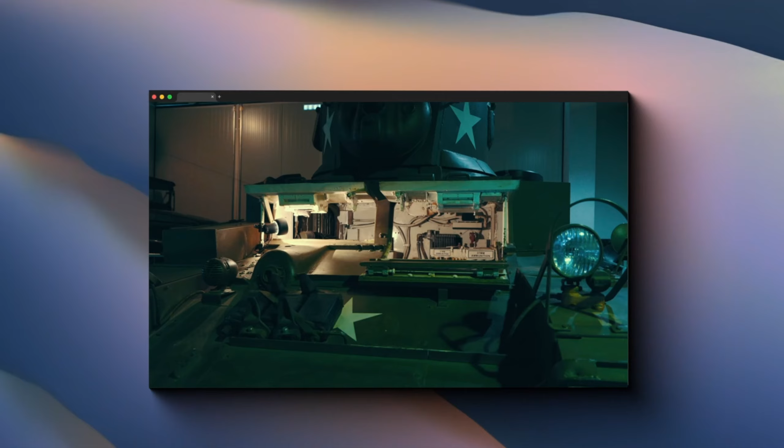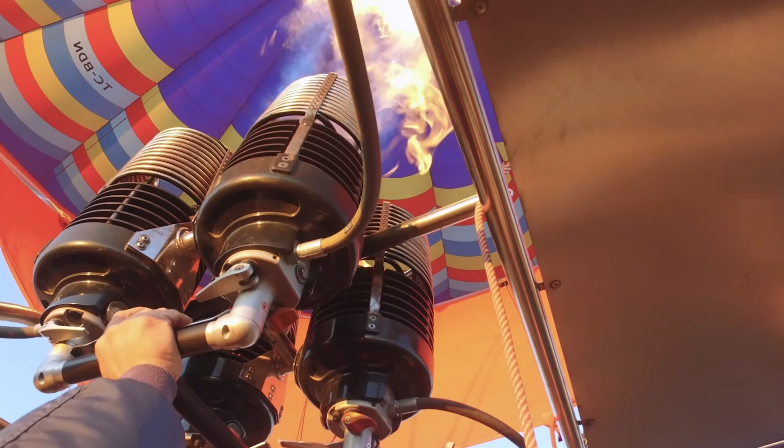Let's start by clearing up a massive misconception. When I say gas engine, I'm talking about the reciprocating piston engines you find in cars, not the fuel itself. Because here's where it gets interesting, modern jet engines actually do burn a type of gasoline. It's called jet fuel or kerosene, which is basically gasoline's more refined cousin.

But the way these engines burn that fuel? That's where the magic happens. It's the difference between pushing yourself on a skateboard versus strapping a rocket to your back. Both might get you moving, but one is clearly better suited for certain situations.

Think about this for a second. A typical car engine has hundreds of moving parts: pistons pumping up and down, valves opening and closing, a crankshaft spinning around. It's like a mechanical orchestra where every instrument needs perfect timing. Now imagine trying to conduct that orchestra while flying through a thunderstorm at 500 miles per hour. Starting to see the problem?

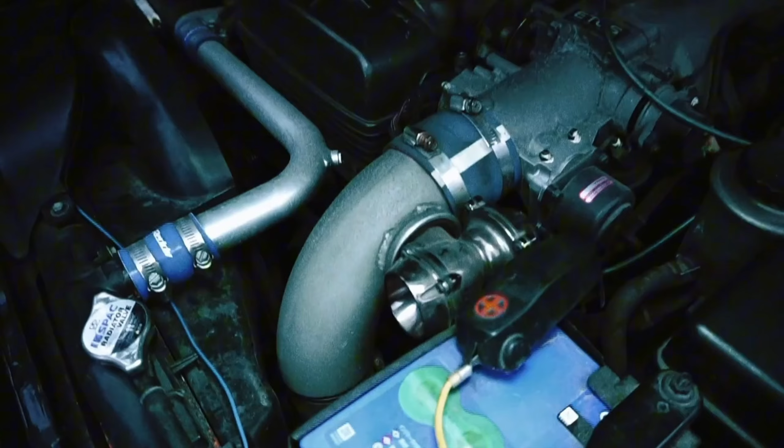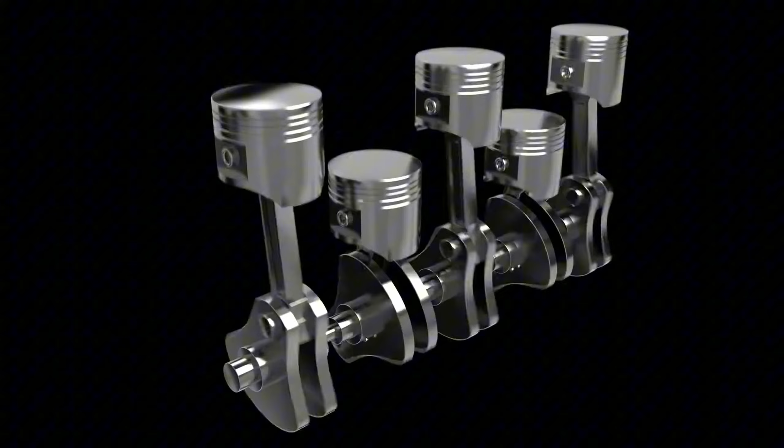Here's where we need to talk about something called the altitude problem. Lighting a match at sea level is much easier than lighting a match at the top of Mount Everest. Why? Because the air up there is about 1/3 as dense as it is down here. Your car engine faces the exact same problem. Piston engines are like that friend who can only function with their morning coffee, except their coffee is oxygen. They need a very specific mixture of fuel and air to work properly.

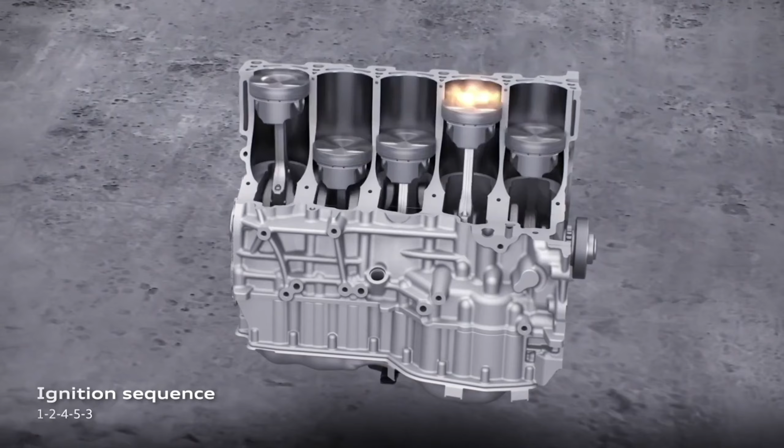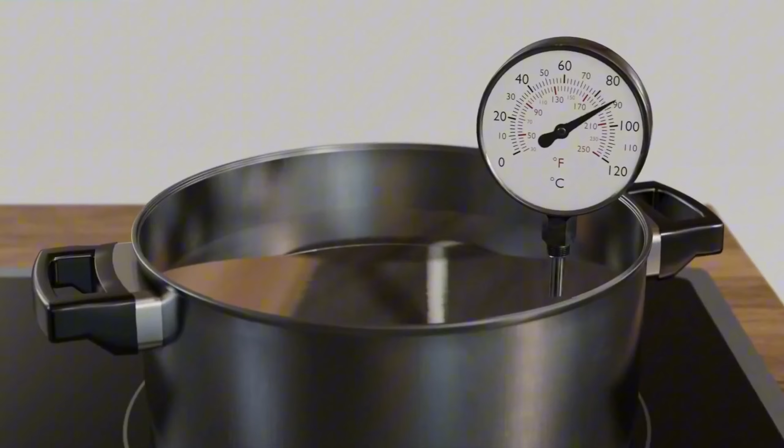At sea level, no problem. But climb to 30,000 feet, and that engine is basically suffocating. Commercial airliners cruise at altitudes where the air pressure is so low that water boils at room temperature. Your car engine would wheeze, sputter, and die long before reaching those heights.

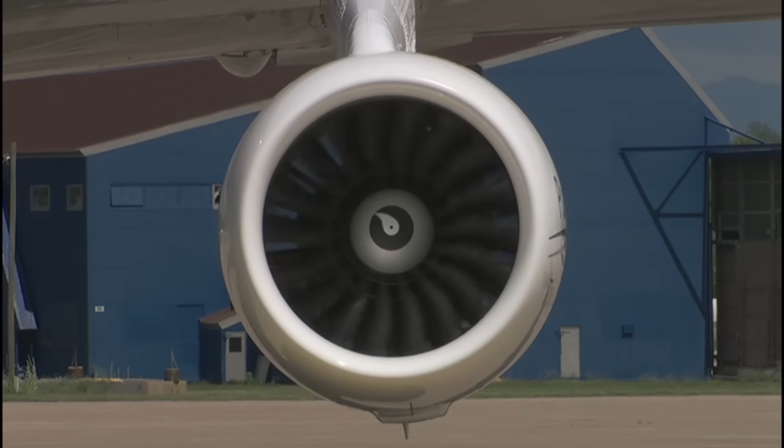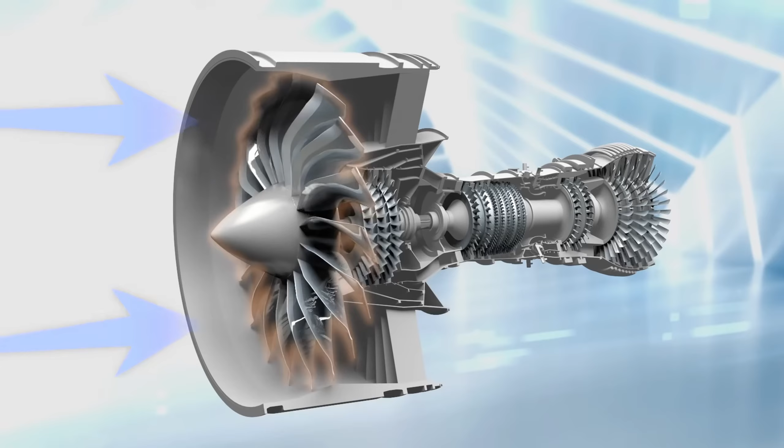Meanwhile, jet engines actually love thin air. They're designed to compress massive amounts of air internally. We're talking about compression ratios that would make your car engine explode. A modern jet engine compresses air by a factor of 40 to 1. It's creating its own atmospheric pressure, basically bringing sea-level conditions with it wherever it goes.

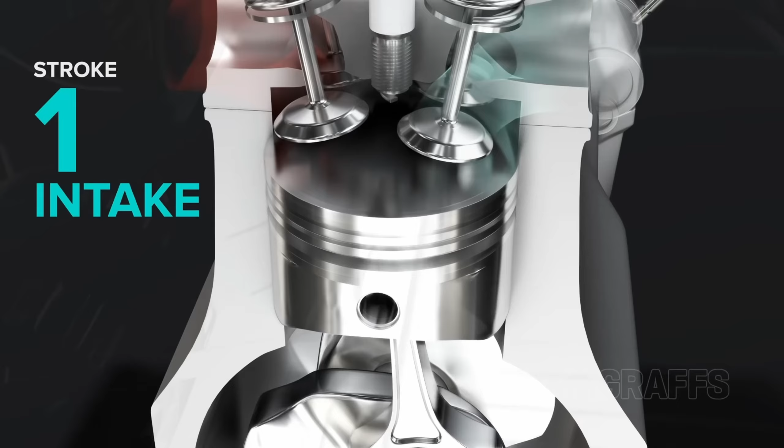Here are some numbers that will blow your mind. A typical car engine produces about 0.5 horsepower per pound of engine weight. Not bad for getting you to work and back. But a modern jet engine? We're talking about 6 to 8 horsepower per pound. Imagine if your 300 horsepower car engine suddenly had 3,600 horsepower but weighed the same. That's the kind of power density we're talking about. It's like comparing a household fan to a hurricane.

Here's a real-world example. The General Electric GE90 engine, which powers Boeing 777s, produces 115,000 pounds of thrust. Converting that to horsepower at cruising speed, we're looking at roughly 100,000 horsepower from one engine. That's more power than 100 Formula One race cars combined.

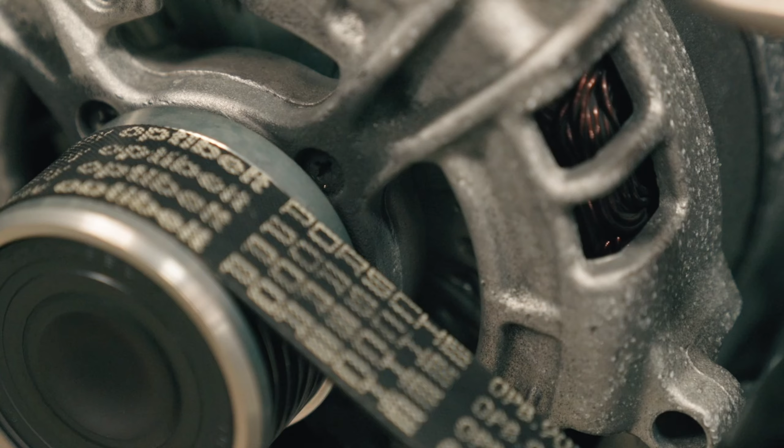Now imagine trying to get that same power from piston engines. You'd need an engine the size of a building, and your plane would look less like an aircraft and more like a flying warehouse. Not exactly aerodynamic. But here's the kicker. It's not just about raw power, it's about sustained power. Your car engine might produce peak power for a few seconds during acceleration, but a jet engine maintains enormous power output for hours on end. It's the difference between a sprinter and an ultramarathon runner who can sprint the entire race.

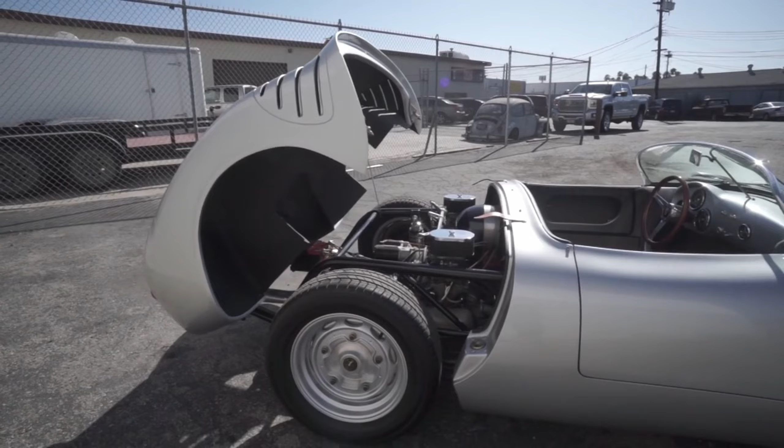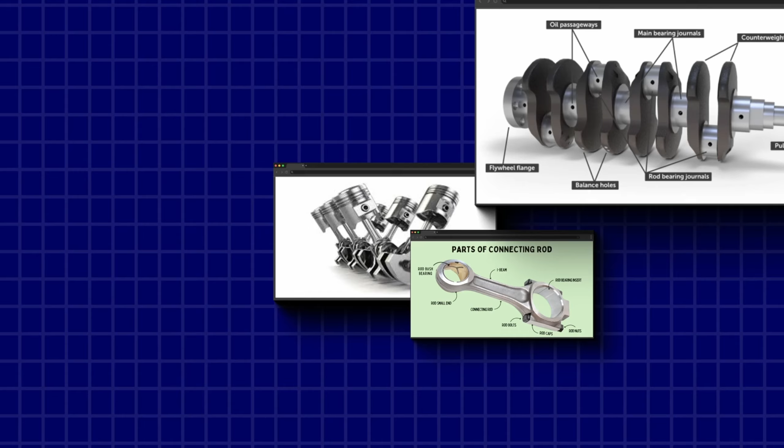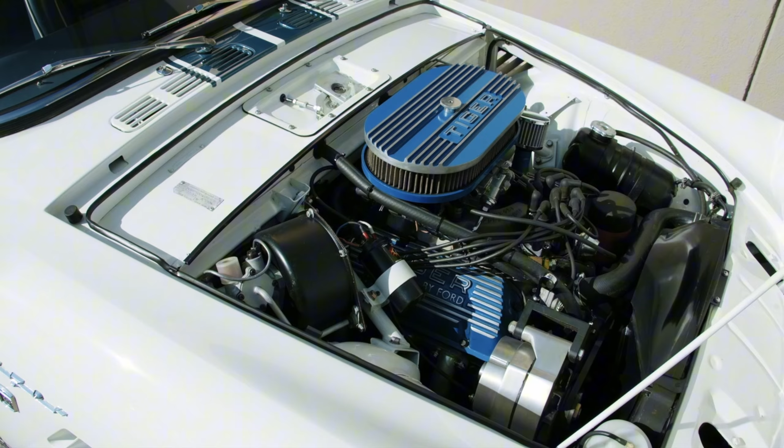This might sound counterintuitive, but jet engines are actually simpler than car engines. I know, how can something that costs millions of dollars be simpler than what's under your Honda's hood? Let's break it down. A car engine has pistons, connecting rods, a crankshaft, camshafts, valves, valve springs, timing chains, and dozens of other reciprocating parts. Each part moves back and forth or up and down thousands of times per minute.

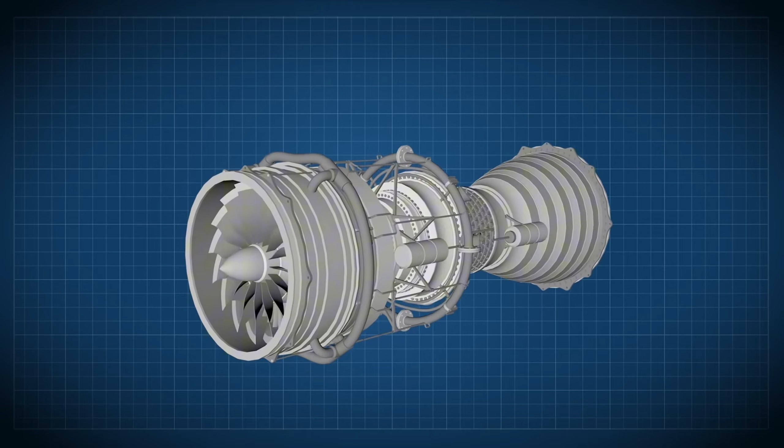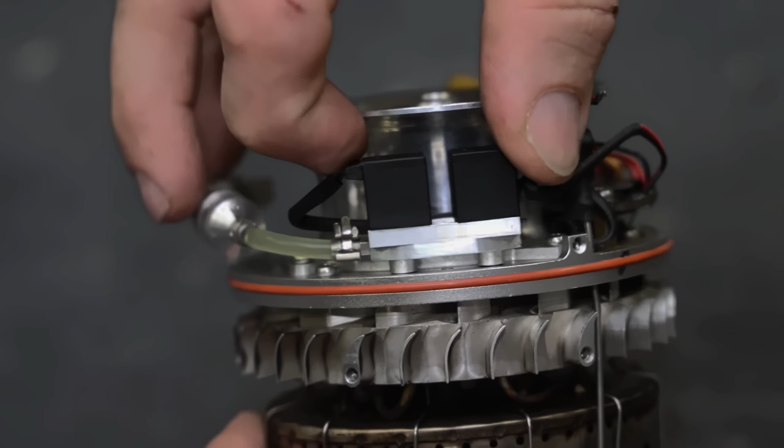Every direction change is a stress point, a wear point, a potential failure point. A jet engine? It basically has one moving part, a shaft with compressor blades on one end and turbine blades on the other. Everything spins in one direction, continuously, smoothly. No reciprocating motion, no complex valve timing, no distributor caps or spark plug wires to worry about. It's elegant in its simplicity. Leonardo da Vinci would have loved it.

Maximum efficiency through minimum complexity. Think about it this way: what's more likely to break, a ceiling fan that spins continuously, or a sewing machine with all its intricate back-and-forth motions? The jet engine is the ceiling fan of the aviation world.

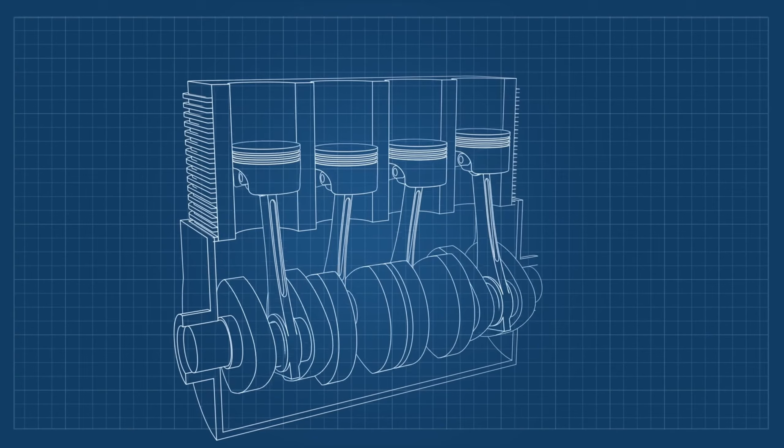If ceiling fans could generate hurricane-force winds and run for 20,000 hours between overhauls... here's something you've probably never thought about while flying: vibration can literally shake an airplane apart. I'm not trying to scare you, modern planes are incredibly safe. But vibration is an engineer's nightmare at 35,000 feet.

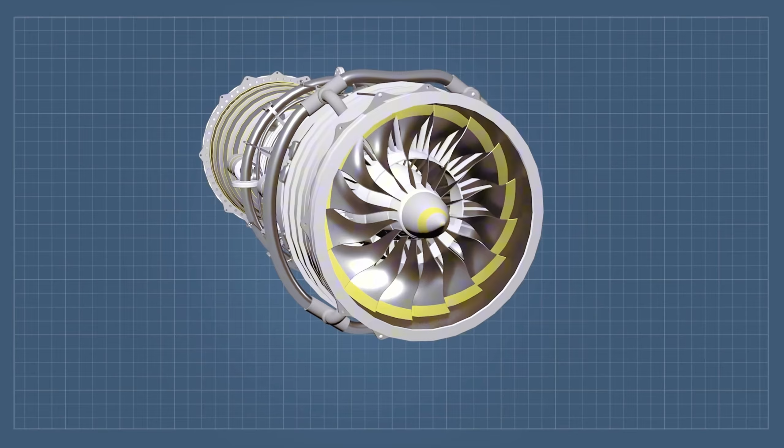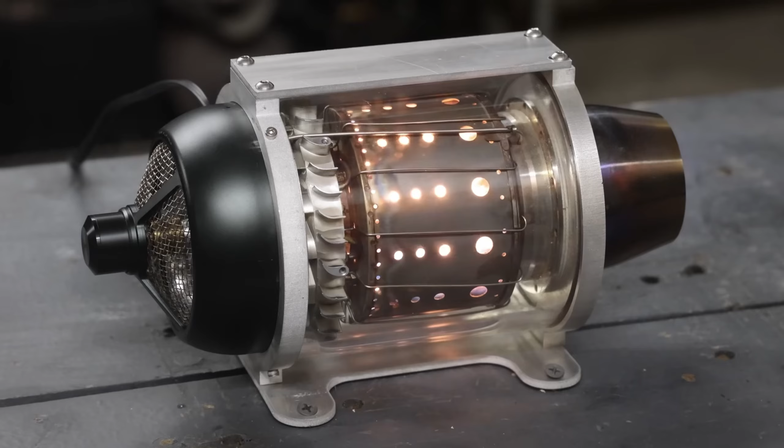Piston engines are vibration machines. Every time a piston fires, it's like a tiny hammer blow. In a six-cylinder engine running at 2,500 RPM, that's 7,500 little explosions per minute. Each one sends a shockwave through the engine mount, through the wing, through the fuselage. Over time, this can cause metal fatigue, loose rivets, and cracked components. Now multiply that by the 4, 6, or even 8 engines you'd need to power a large aircraft with piston power. It would be like strapping a paint shaker to each wing and hoping for the best.

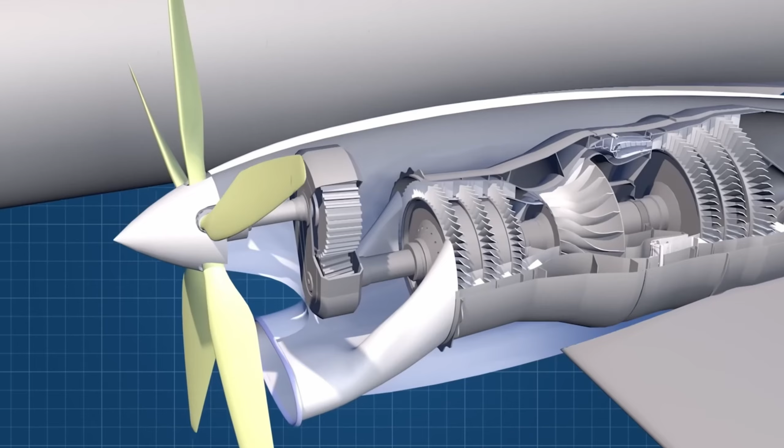Jet engines, on the other hand, run smooth as silk. The combustion is continuous, not pulsed. The rotation is balanced and constant. Passengers can place a coin on edge on their tray table and it'll stay standing during cruise flight. Try that in a propeller-driven aircraft with piston engines — that coin would dance off the table faster than you can say turbulence.

This isn't just about comfort. Reduced vibration means less maintenance, longer component life, and most importantly, better safety margins. When you're 7 miles up in the sky, you'll want everything running as smoothly as possible.

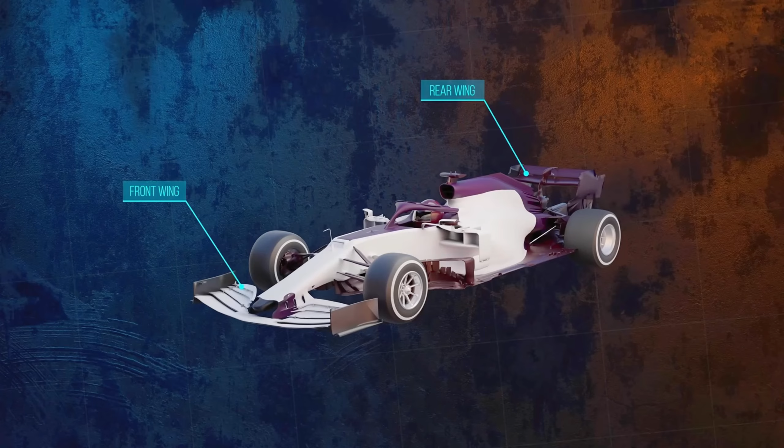Let's talk about speed, because this is where piston engines hit a brick wall — literally, an aerodynamic brick wall. Propeller-driven aircraft with piston engines face a fundamental problem: propeller tips can't exceed the speed of sound without losing efficiency dramatically. As a propeller blade approaches sonic speed, it creates shock waves that destroy lift and create enormous drag. It's like trying to swim through molasses instead of water.

This limits piston engine aircraft to about 400 to 450 miles per hour max, and that's pushing it. Most cruise much slower, around 200 to 300 miles per hour. Meanwhile, jet engines laugh in the face of the sound barrier. They're designed to handle supersonic airflow. The Concorde cruised at Mach 2, twice the speed of sound. Modern commercial jets cruise at about 550 miles per hour, just under the sound barrier. Not because they can't go faster, but because going faster isn't economically efficient for passenger travel.

Here's a mind-bending comparison. A flight from New York to Los Angeles in a modern jet takes about 5.5 hours. In a fast piston engine aircraft, you're looking at 12 to 15 hours minimum with multiple fuel stops. That cross-country business trip just became a 2-day adventure.

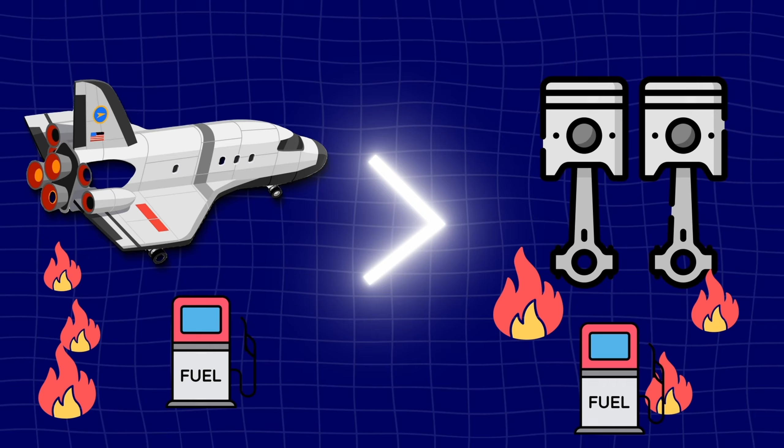This might shock you, but jet engines are actually more fuel efficient than piston engines for their intended purpose. Wait, what? How can something that burns thousands of pounds of fuel per hour be efficient? It's all about the right tool for the job. Sure, a jet engine burns more fuel per hour than a piston engine, but it's also moving 300 people at 550 miles per hour.

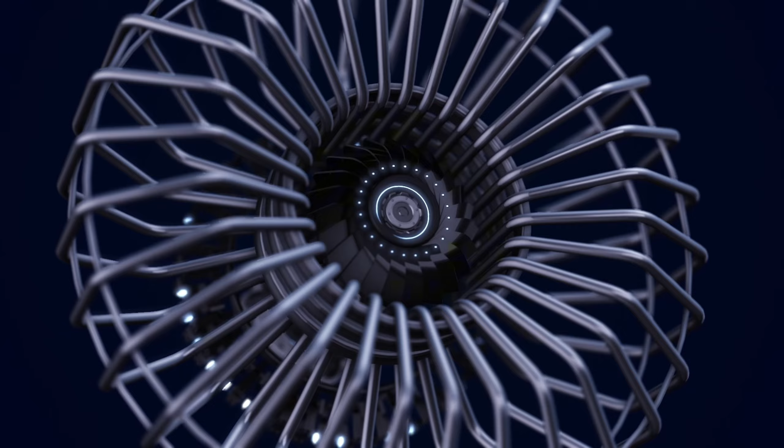Do the math on fuel per passenger mile, and suddenly jets look pretty good. Modern high-bypass turbofan engines are marvels of efficiency. They move huge amounts of air at relatively slow speeds, which is far more efficient than moving small amounts of air at high speeds. It's the difference between fanning yourself with a newspaper versus blowing through a straw — which one moves more air with less effort? At cruising altitude, where the air is thin and drag is reduced, jets can achieve fuel efficiency that would make piston engines jealous. We're talking about 100-plus passenger miles per gallon in some modern aircraft.

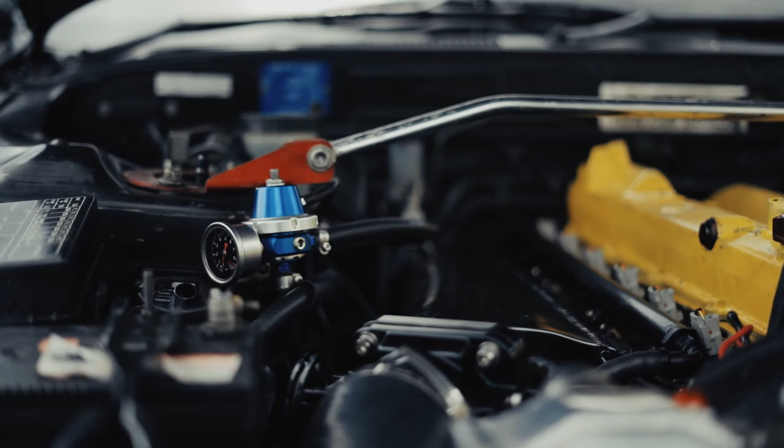Your car probably doesn't even get 100 passenger miles per gallon with just you in it. Plus, jet fuel has more energy per gallon than gasoline, and jets can carry enormous amounts of it without the complex fuel management systems piston engines would need. No carburetors to adjust for altitude, no fuel pumps struggling against vapor lock, no concern about fuel mixture ratios. The engine takes what it needs and burns it completely.

When you're flying over the Pacific Ocean, thousands of miles from the nearest airport, engine reliability isn't just important, it's everything. This is where jet engines absolutely demolish piston engines. Modern jet engines are so reliable that twin-engine planes are certified to fly up to 5.5 hours away from the nearest airport on a single engine. That's called ETOPS, Extended-range Twin-engine Operational Performance Standards. And pilots joke it stands for engines turn or passengers swim.

The mean time between failures for a modern jet engine is measured in tens of thousands of hours. Some engines go their entire service life, 20,000 plus flight hours, without a single in-flight shutdown. That's like driving your car 1.2 million miles without the engine ever failing. Piston aircraft engines require overhauls every 1,500 to 2,000 hours. That's like rebuilding your car engine every 90,000 miles. And in-flight failures, while still rare, are orders of magnitude more common than with jets.

The key is that jets have fewer failure points. No magnetos to fail, no carburetors to ice up, no valve trains to break. Just smooth, continuous rotation with built-in redundancy. Each engine is actually multiple engines in one. If a turbine blade fails, the engine keeps running. Try running your car with a broken piston and see how far you get.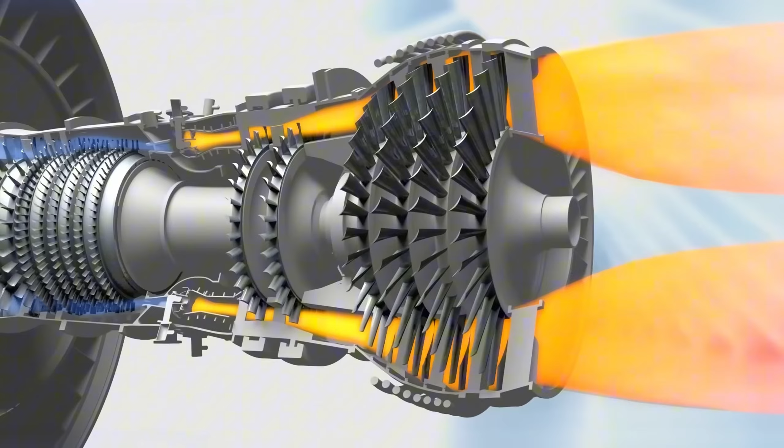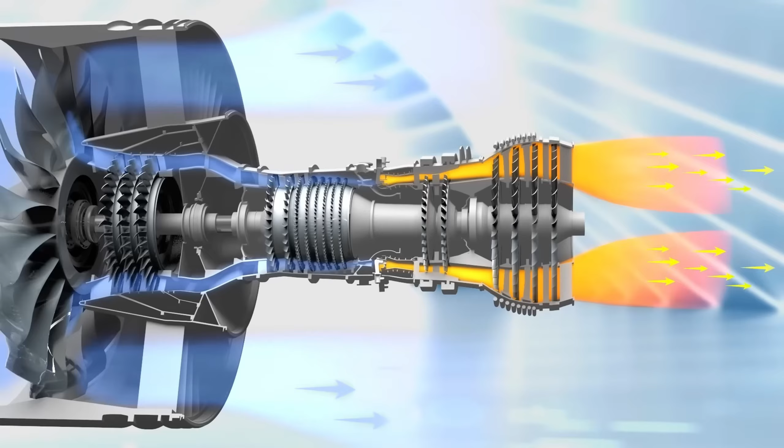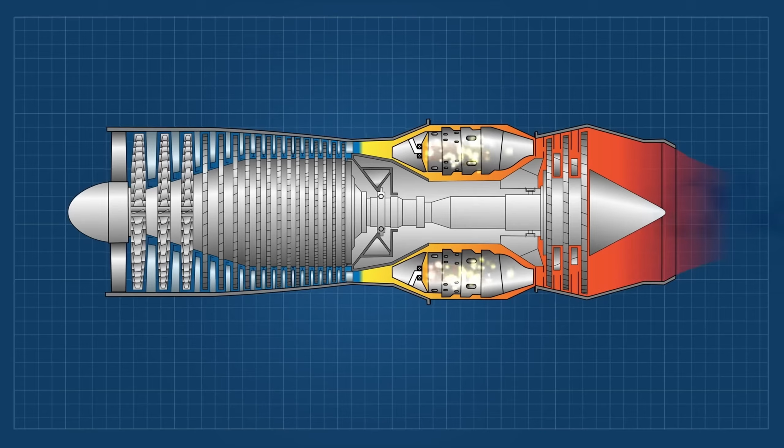Here's something wild. Jet engines actually run hotter than piston engines, but they handle it better. The combustion chamber in a jet engine reaches temperatures over 2,000 degrees Celsius, hot enough to melt the engine itself. So why doesn't it melt? Engineering genius, that's why. Jet engines use sophisticated cooling systems where air flows through tiny holes in the combustion chamber walls, creating a protective buffer of cool air, still hundreds of degrees, but cool by comparison. The metal components never actually touch the hottest gases.

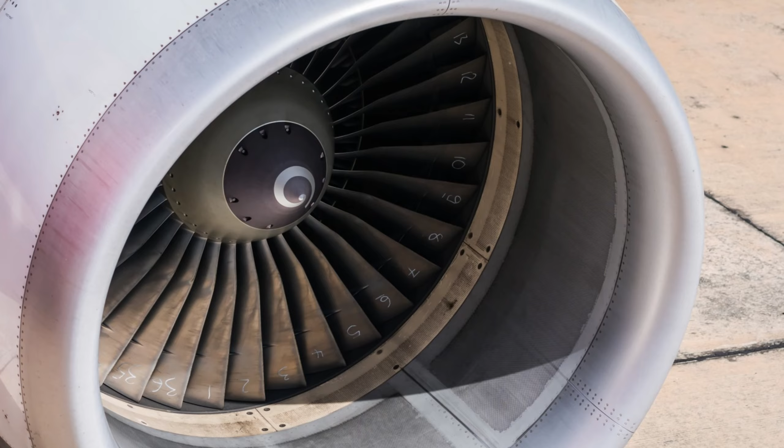Piston engines can't play this game. They rely on physical contact between pistons and cylinder walls, with all that friction and heat buildup. They need complex liquid cooling systems with radiators, water pumps, and thermostats, all potential failure points. And at high altitude, where the air is thin, cooling becomes even more challenging.

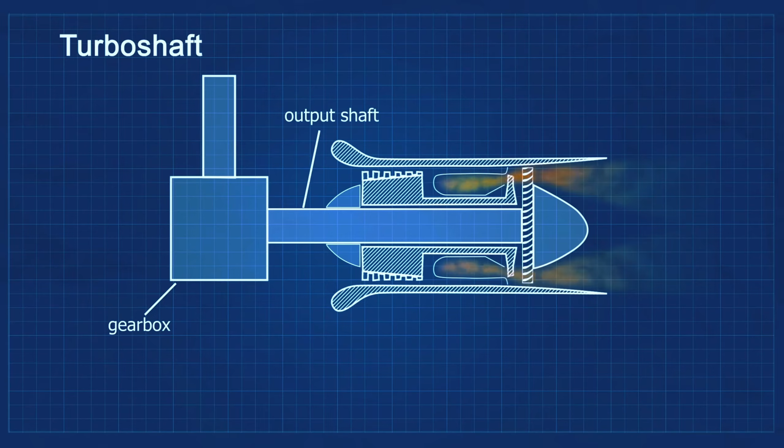Jets actually use their extreme temperatures to their advantage. The greater the temperature difference between intake and exhaust, the more efficient the engine. It's basic thermodynamics, the Carnot cycle, if you want to get technical. Piston engines are limited by the temperature their metal components can withstand in direct contact with combustion.

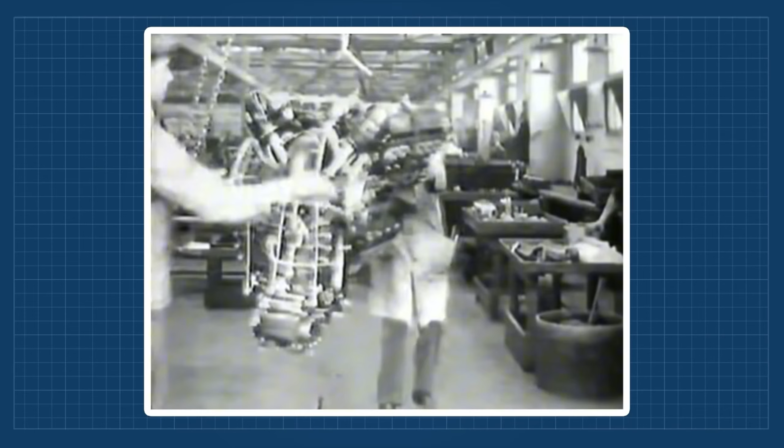The gap between piston and jet technology is only getting wider. Modern jet engines are incorporating ceramic matrix composites that can withstand even higher temperatures. They're using 3D printed components with internal cooling channels impossible to manufacture traditionally. They're adding geared turbofans that allow different sections to spin at optimal speeds. Meanwhile, piston aircraft engine technology has barely changed since the 1960s. Sure, we've added electronic ignition and fuel injection, but the basic design would be recognizable to Charles Lindbergh.

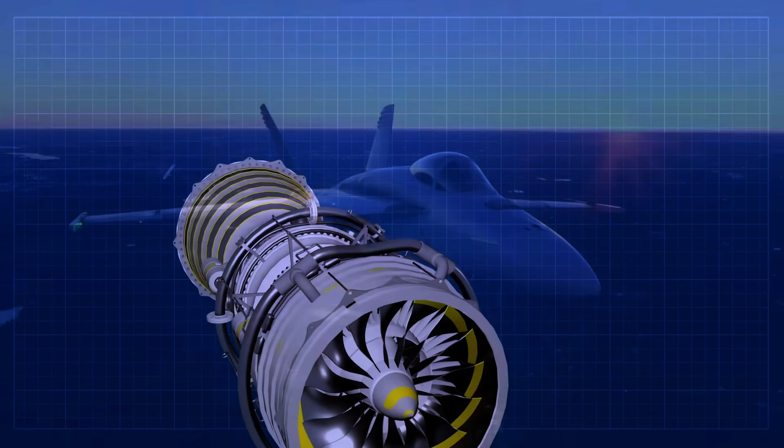The next generation of jet engines will be even quieter, more efficient, and more powerful. Some experimental designs are achieving bypass ratios of 15:1 or higher, meaning 15 times more air flows around the engine core than through it. That's like having a propeller's efficiency with a jet's power and altitude capability.

So there you have it, the fascinating truth about why planes don't use gas engines. It's not just one reason. It's a perfect storm of physics, engineering, and practical requirements that make jet engines the only sensible choice for modern aviation. Ready for takeoff? Because now you know exactly what's powering your journey through the skies.